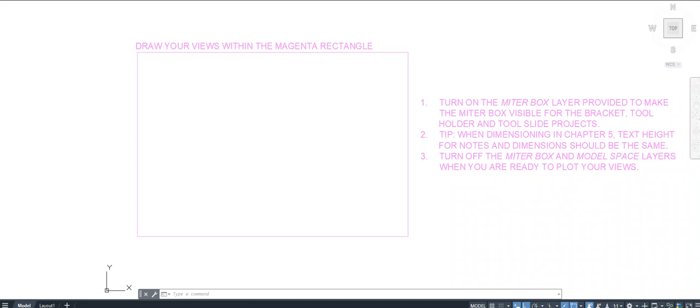Okay, we're going to make the views for the flange bearing. One of these views includes a section view. And let's go for this. We're going to start with our front view here. And our front view we're actually choosing to be what would appear to be this top view right here.

And then when we make the quote unquote top view here, we're going to flip this around and it'll kind of be like you're looking at it upside down from this top view right here. So let's start here. And we only need two views for this part. So because of that, we don't actually need to use the miter box. And because of that, I'm just going to freely draw this view down here on this page somewhere.

I'm going to start by locating the center of my three circles. And I see that I've got these two that are 8 across from each other and this one which is right in the middle of those two. So I can actually just start with a line that is 8 inches long. So 8.

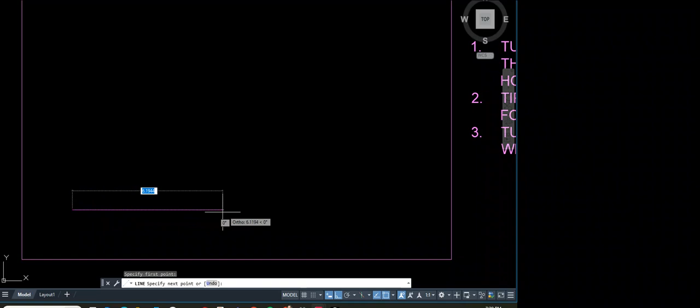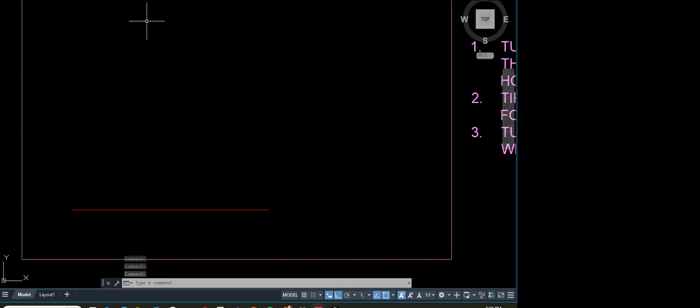And while I'm here, let me make sure I'm on the right layer. Going to go to my visible layer. And while I'm talking about the layers, I'm going to backtrack for a second here. I actually want to make sure that I have all the layers and my dimension styles on this that I want. I should have my layers copied over, but if I don't, what I can do, you got this from your Imperial prototype. I have my tool holder open. I'm going to copy the layers over from my tool holder.

So what I'm going to do is go to DC, which is Design Center. DC, enter. That pops up this, and I can go over to my tool holder and look at my layers. And any layers that I'm missing, I can click on and drag and drop into this space right here. And then I'm going to do the same thing with dimension styles. I'm going to make sure that I drag and drop my large and my small into this part right here. Okay, so continuing with the drawing.

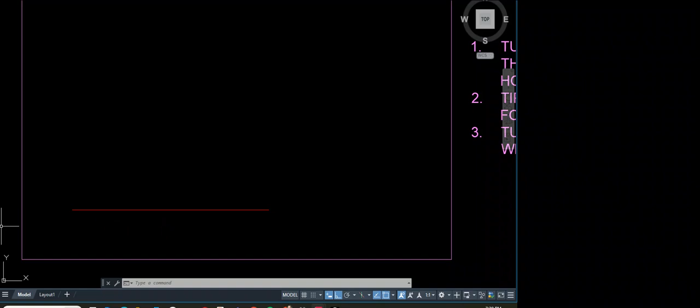Now I can make my circles coming up from this part. So our center circle has a diameter of 4. Going to grab my circle tool and find the midpoint of this line. And I'm going to type in D for diameter, D, enter, and type in 4, 4, enter. A little crowded out, but that's fine. We can move this. I'll actually go ahead and move it right now.

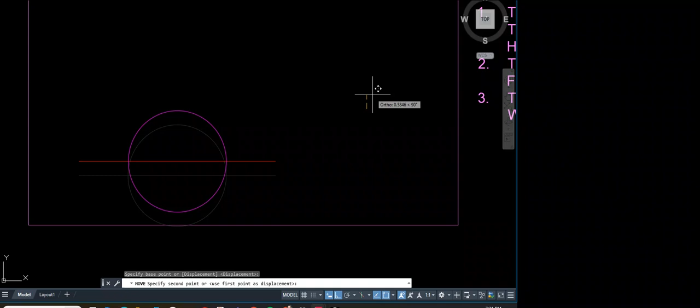Just move it up. When I want to move something up without any connection to anything else, I actually end up clicking off away from the part so I don't get any weird snaps. You see how that makes it a lot easier? So I'm using ortho there. Okay, now these outer circles right here have a radius of 1. So I'm going to do this, and it's already set for radius, so I just type in 1. And I could do the same over there, or I could copy this over.

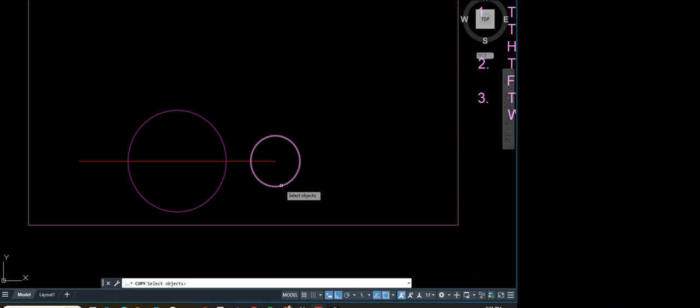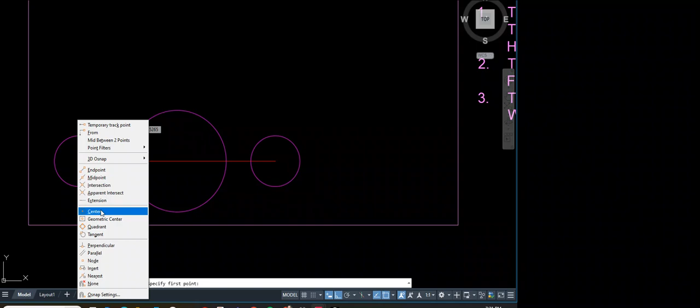Whoops, I did a move instead of a copy, so let's do a copy now. Here we go. And now I want to be able to connect these with tangency lines. And the way I do this is something kind of special. What I'm going to do is I'm going to grab my line tool, hit Control and right click, and select tangency, which will be right here. Tangent. You'll see how I get that tangent symbol with the 3 ellipses.

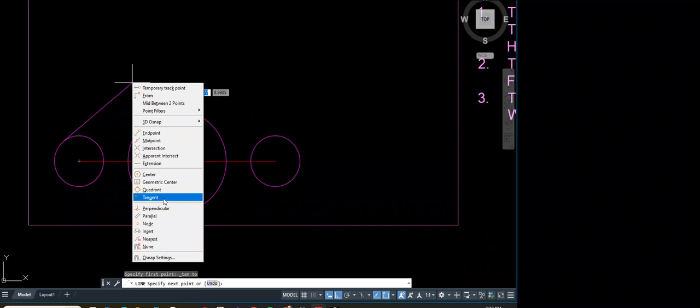That pretty much means that if I click on this circle, I can keep moving my line around and it'll maintain a tangency to that circle no matter what. And now before I click again to get this circle, I'm going to Control right click again and get tangent again. Now you see how I have that tangent symbol with the ellipses again. And that actually means I could even click anywhere along here and it'll automatically correct itself for me. So even if I click right here where it looks like it's obviously not tangent, bam, makes it tangent for me.

So I'm going to do that again up here. Now I could do that 4 more times, or I could actually mirror this. So if I was going to mirror this tangency line, I select my object and I create my mirror plane right here. And then I could mirror both of those down.

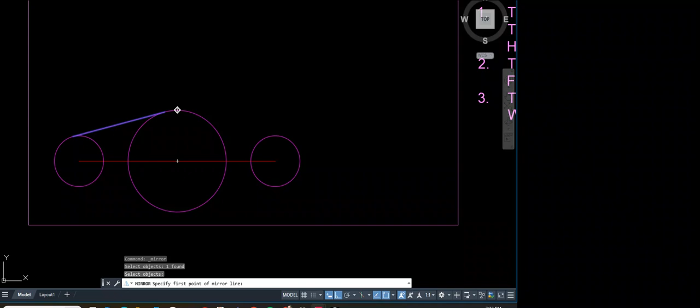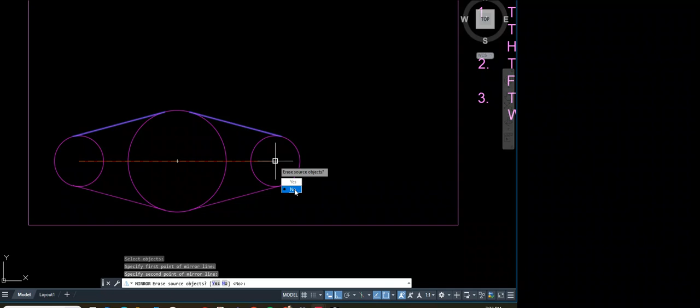I do not want to erase source objects. I'm going to do that again. I'm going to mirror these across the part. Select those. Do not want to erase source objects. Okay, now I can actually just erase this line right here.

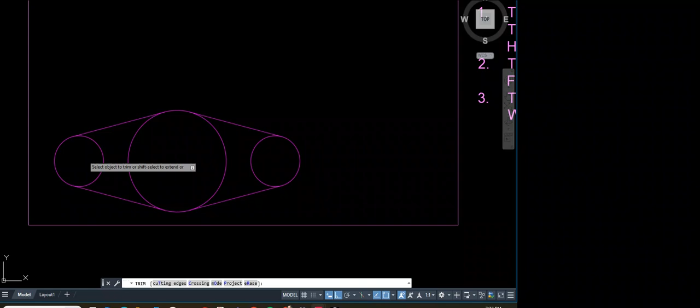Now we've got some counterbore holes right here and a countersink hole in the middle. From our top view, they're going to look the same as each other. So all we really need to do from our top view is catch the 2 diameters for each one and place them on the top view. Let me trim this up really quick. I like to trim as I go.

So here I have a diameter of 0.75. I'm going to click on D for diameter, D, enter, 0.75, enter. And I have a diameter of 1 for that outer bore. Type in D for diameter, D, enter, 1, enter.

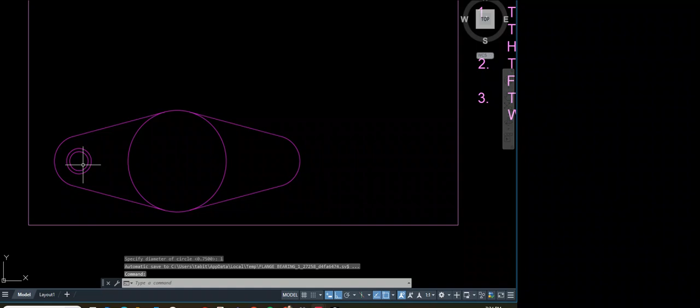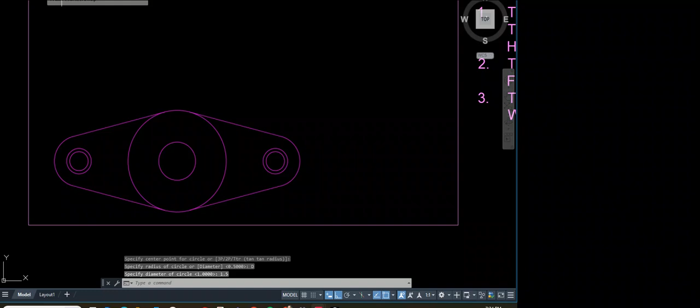So let's start with that 1.5. D for diameter, D, enter, 1.5. D for diameter, D, enter, 2.5. And I have my top view done right there.

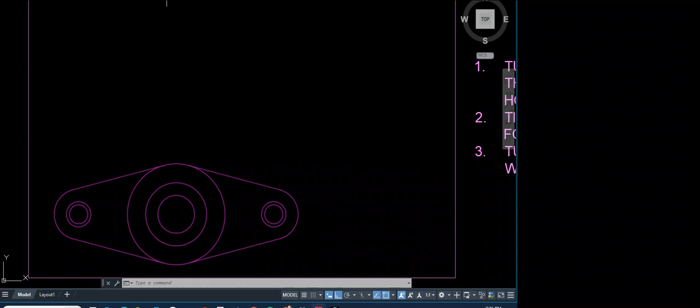Now I'm going to project up to my view up here, and I'm actually going to turn this into a section view. So I could do 2 things. I could draw it with hidden lines first and then convert it to a section view, or I could just draw it straight to a section view. I think what we're going to do today is we're going to draw it with hidden lines first and then translate it into a section view. That way the step-by-step is very clear. So let's just start by making the visible lines of this part.

I'm going to acquire a tracking point right here, bring that up, then take this over, and I'm going to end it right there. If you guys aren't getting that green dotted line, that's from Object Snap Tracking. A really useful thing to mess with. You just hover over certain parts until you see a line that will guide you, and if you stay close enough to it, it'll maintain its place for you.

Okay, and then I know that this platform here is 1 tall, so I'm going to use my offset tool. O, enter, 1, enter. And I know that this is 3 tall, so I'm going to use my offset tool again. And I just hit enter to get back into my offset tool. That's something I could do instead of exiting out. And I'm going to type in a new offset, 3, enter.

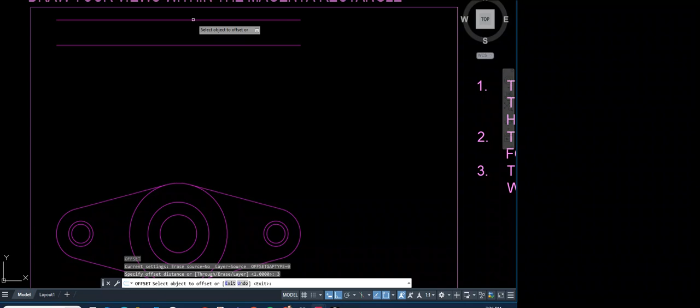There we go. And now I can actually just acquire some points here to grab that right there. Draw some lines to complete my platform here. And use my trim tool to trim this up.

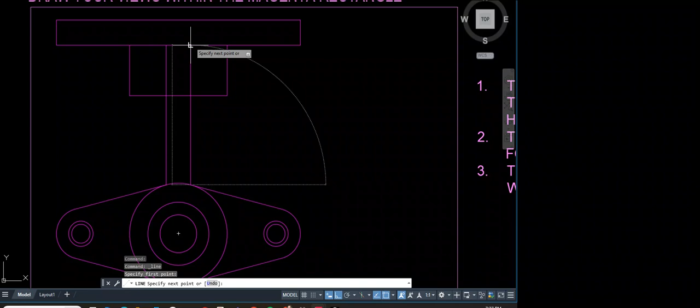Now I'm not completely done with my visible lines. I would actually need to trim this little section here. I'm not going to trim that, but I'm going to trim the representation of this little surface here, right here, because we aren't going to see a line there. So though we're going to turn this into a section view, this is a good little exercise. That's how you would do that.

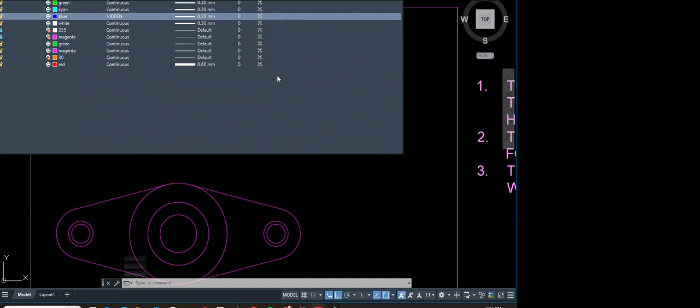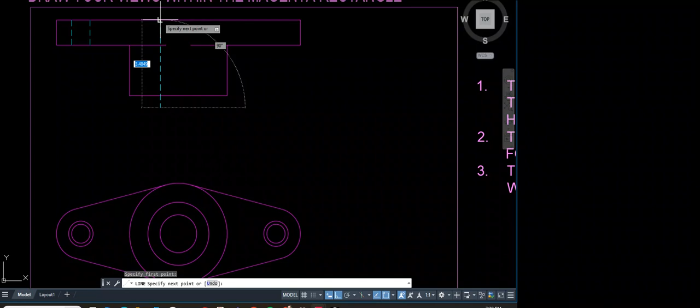Okay, now we're going to get our hidden lines. Go to my hidden lines. I'm going to change their color so that they're easier to see while we're going through this. There we go. I'm on my hidden lines layer. And I'm going to get the depth. I'm going to get the main through hole on each of these put in place here. Trim. And I'm just going to do these two, and then whatever I do over here, I can mirror over.

Let's start over here. Now I have a counterbore here, and what I need to do is make this counterbore, and I need to give it the correct depth. The depth of this counterbore, we can see, has a depth of 0.125. So what I'm going to actually do is I'm going to offset this line right here, 0.125, enter. So that's O, enter, 0.125, enter, select objects, then drag this way.

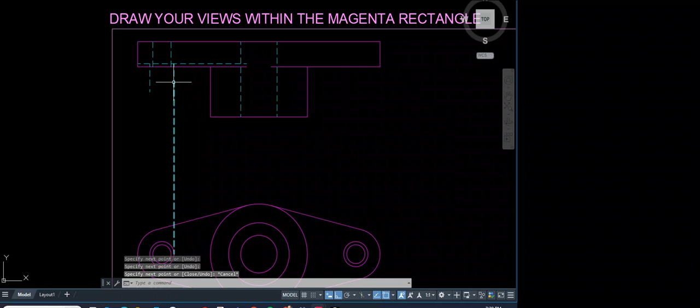And I'm going to take this and move it to my hidden lines layer. And then I can project the edges of this down, or rather up. And now we can trim it up. And you will see all of these lines right here.

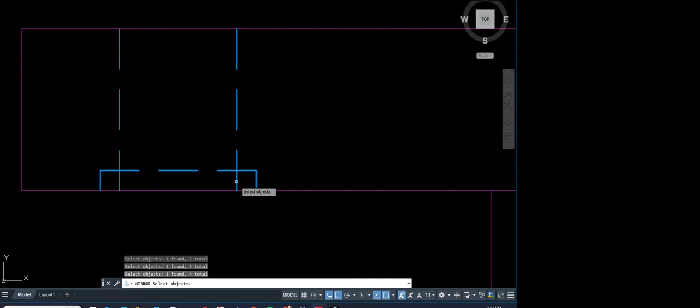Now I'm going to mirror this across the part. So I'm going to click my mirror tool, select the object that I want to mirror, which is 5 little objects this time. Hit enter, and then select my mirror line, which will be the midpoints of these lines. Click, click, and then no, I do not want to erase the source objects.

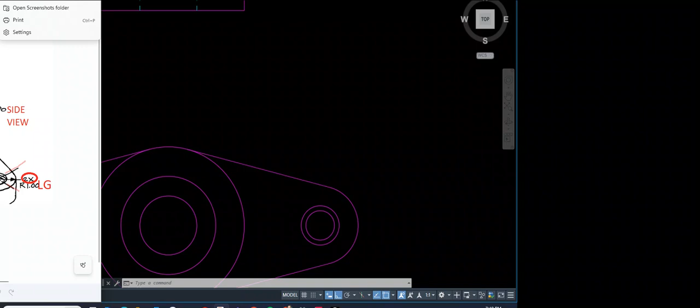All right, this last part's kind of tricky. Whenever we have a countersink hole, a standard angle for a countersink hole is 82 degrees. And essentially what that means is your hole is like this in the part.

And from here to here is 82 degrees. What that means is that half of this is going to be 41 degrees. Okay? And now we take this right here, and if we draw another line here, we have 41 degrees right here. And then we have another amount right here because we have a total of a 90-degree angle here to here. And this will be 49 degrees, which is 90 minus 41.

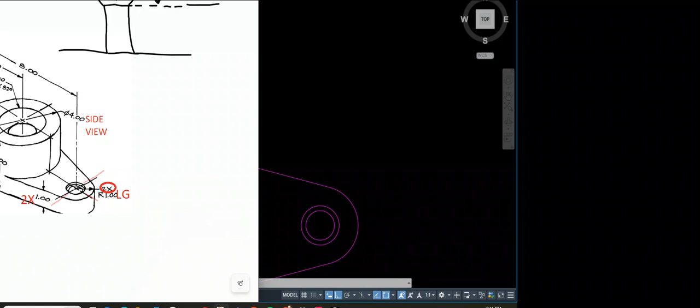So because of the way AutoCAD is going to have us draw this line, we're either going to be typing in 41 or 49 degrees depending on the angle that we're approaching this at. This is how we're going to do this. We need to find the edges of where this countersink starts, because remember, we are given this outer edge right there. So we know where that is. We can pick that out on there.

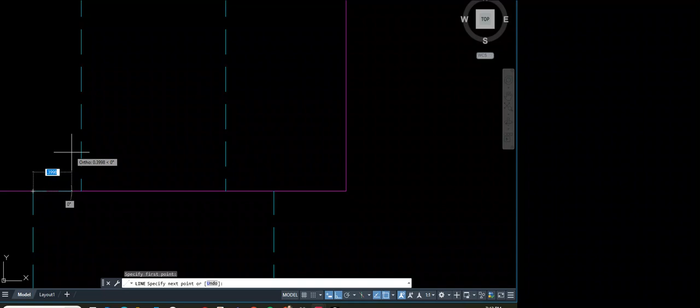And now I'm going to take this line here and use polar coordinates. So I'm going to turn off my ortho. I'm going to just type in something kind of long, like 1.5, and then hit tab. That's how I get into my polar coordinates, which means now I can type in an angle. And I'm going to type in 49. Here we go. And now I can take this and mirror it over.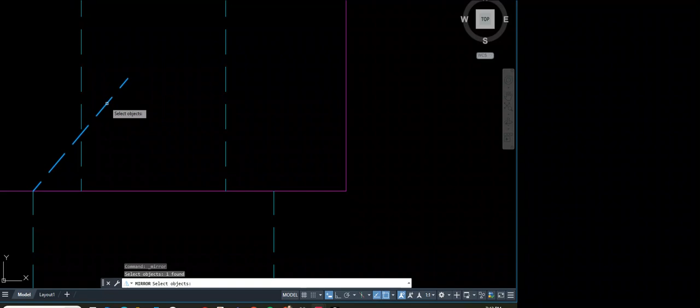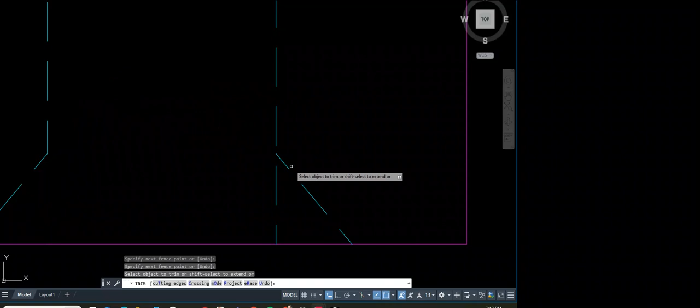Now I can trim all of this up. So we're going to just delete these lines, trim these. Now there's still the one thing we're missing for hidden line view. We're going to have this line showing right here. There is a line there. See it right here. And you'd still see it through the part if that part was transparent.

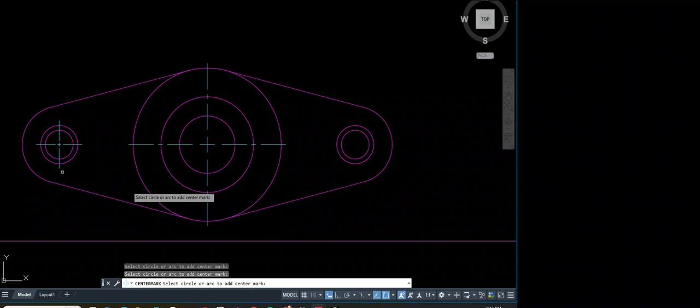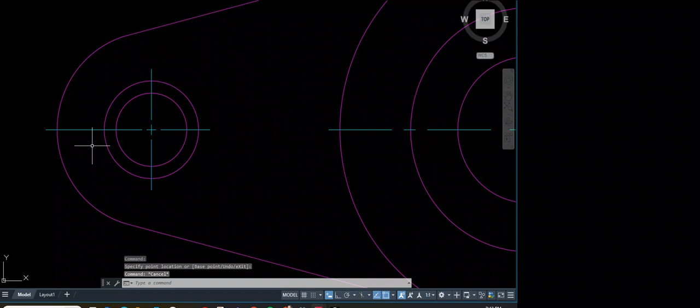Lastly, let's add some center marks to our part. We want to extend these center marks out to this outer circle here. So I don't grab the arrow, I actually grab the little handle here and drag this out. Grab that arrow and drag that out. And then I have center lines up here.

To stay organized, let me plop these on my center line layer. So the way I move them is I click on them and I go to my center line layer, which is going to be the same color, but it's the principle of it for organization later. I'm going to make center lines here. They're under my annotate tab. The center line, and it's going to go right in between these two lines right there. Center line here.

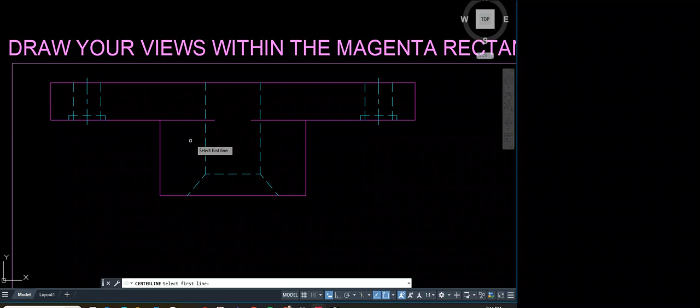And right here, we're going to have to be careful with this one. I'm going to need to extend it past the edge of this part. So you can see how it only went through here because it only goes according to the two lines that you pick. So I'm going to do the same thing there where I select the handle and I drag it to this outer edge, and then it will automatically have it extending past the edge of the part right there.

All right, so that would be a successful multi-view that shows our hidden lines and our visible lines. What I'm going to do is I'm going to take this top view and transform it into a section view. So the first thing I'm going to do is go into my layers, and I'm going to make a layer for my cutting plane. This layer you can copy over from your border layer because that has a 0.6 millimeter line weight. We don't use the border layer. That was an automatic thing in AutoCAD.

So if you don't have that, just make a layer that's called cutting plane that is plottable, and you can make it what color you want. I'm going to choose dark blue. The line type is dashed ×2, and the line weight is 0.6 millimeters. Leave that up there for a second. Okay.

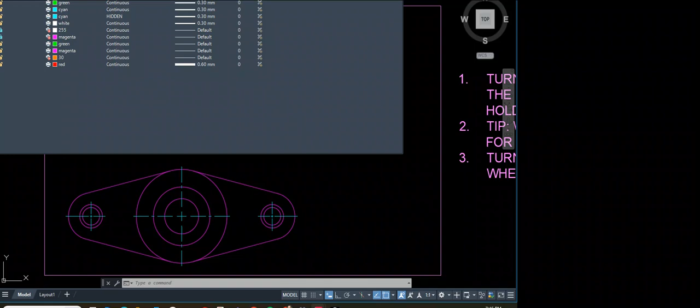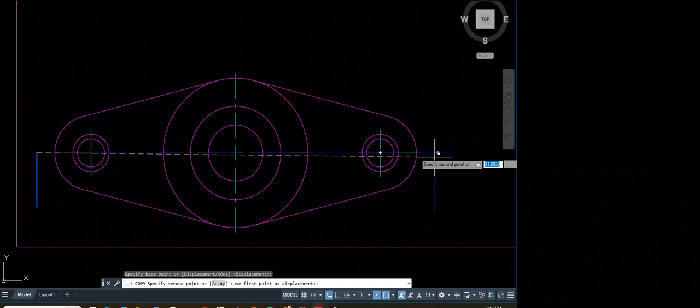So now I have a cutting plane layer, and I'm going to grab my line tool and I'm going to make a cutting plane that goes straight through the symmetry parts of this. So it goes across here and down. I'll copy that. Let me change the color of this so we can see it a little better. It's light blue right now. Let's make it green. There we go.

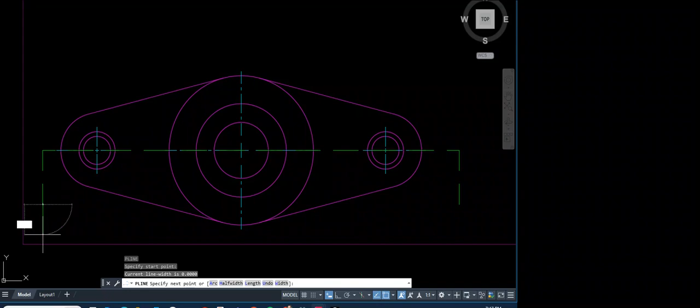All right. So to get the arrows on this, the arrows for a cutting plane are twice the size of arrows for dimensions. They're going to be 0.25 long and 0.125 wide. So I'm going to get a polyline, which I can get from up here. I can type in PL, enter. And I'm going to start my polyline on the very end here and then continue down, make it 0.25 long. So it doesn't look like much, but you can see when I highlight, I have a line right here and I have my polyline sitting right at the end here.

So I'm going to right click on this and go to properties. And I have in my properties for this polyline, I have a start segment width and an end segment width. I'm going to make the start segment width to be 0.125, and the end segment width to be 0. 1 would be a weird trapezoid thing on the end of that. We don't want that. So it's 0.125 start, 0 end.

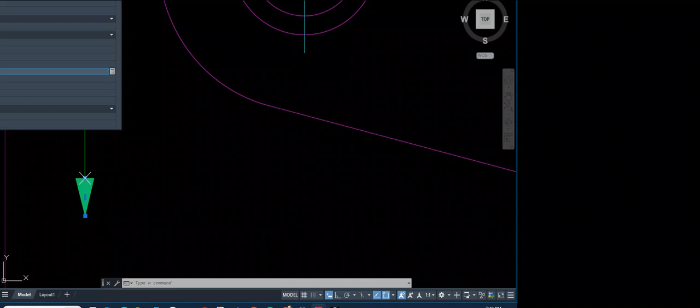Here we go. Got a nice little green arrow there, and I'm going to copy this green arrow over. So I'm going to get my copy tool, select the base of the arrow as my base point, and drag it over here and just put it on the end right there.

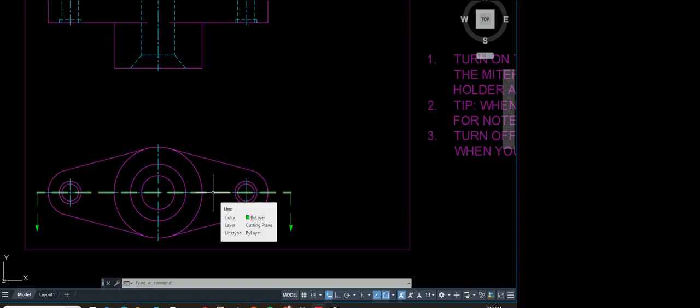Okay. Now, this section view is as though I took this part and I cut it right here and I only kept the part where these arrows are pointing, right? So this right here would be a reflection of that, and we would have hatch marks in the solid parts of the part that are being cut through. That would be the pie that you're cutting through, the pie filling.

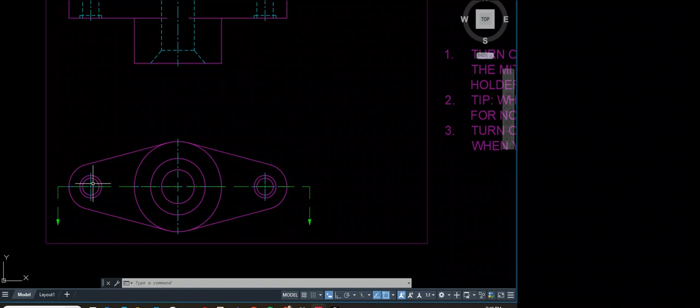So what I like to do is I check out my hidden lines and I say which of these hidden lines are going to be turned into visible lines. And it looks like all of these are. You're going to see all of these visible lines on this section view, because this section view goes through all 3 of these holes, these 2 identical ones and the one in the center. So I'm going to just select these here, and I can select them one at a time. I can do something kind of fancy where I lock my center lines. That allows me to select more than a few at a time.

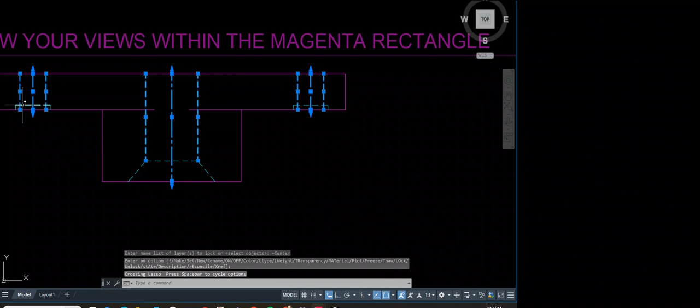And I'm going to change these to my visible. It did select the center lines for me when I did that. That's fine. That's still the faster way to do that, is to go back and select the center lines and change them back to the center layer. There we go.

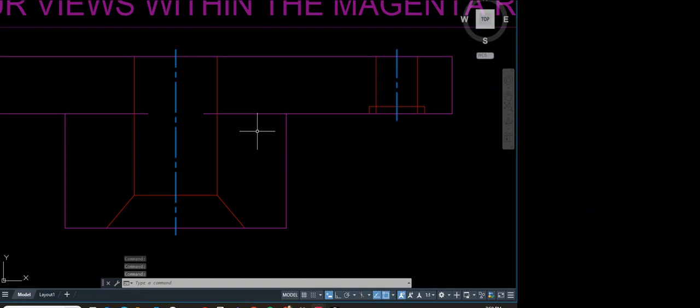And now I'm going to use my trim tool, and I don't need these anymore right here because we're cutting through this part. We're no longer looking at the edge of this part. We're looking along this green line right here. Those should have been trimmed for the hidden lines view as well, right there.

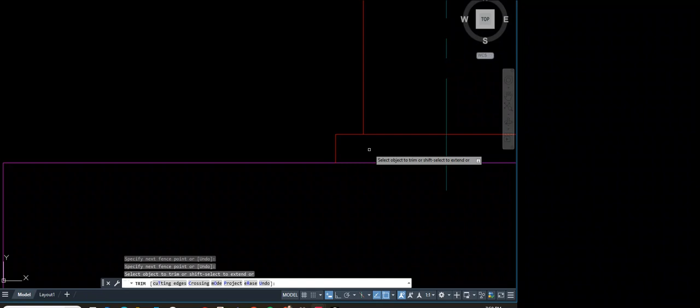Okay, now that I have this, I can get my hatch tool. I need to make sure that I have a hatch layer. So I made a hatch layer with a cyan color. It'll be a very simple layer. Just pick a color that is distinguished from your other ones, a continuous line type, and a line weight of default.

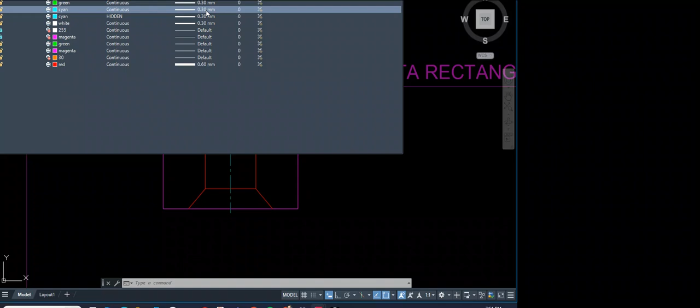Okay, so to make a hatch, I'm going to type in hatch into my menu bar, and I'm going to go up into my hatch creation editor up here and click on ANSI 31, and then I'm going to pick in here where I want my hatch. Now, sometimes you'll open up the hatch creator and you won't get this little pick point. You'll get a little thing that says select objects.

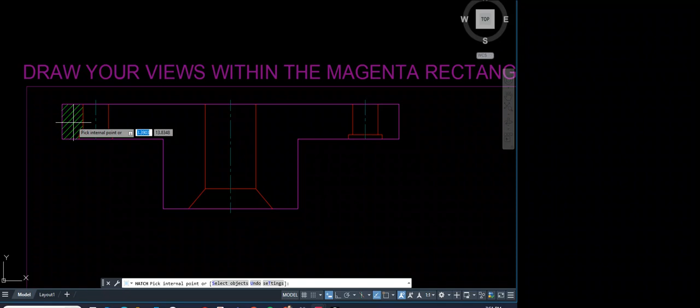If that's the case, before you do this, you can come down here and you'll have select internal points down here instead of select objects, and you'll click on that to change it to get this crosshairs that I'm looking at. Okay, so I have this crosshairs. I'm going to select my areas that are hatched. And there we go.